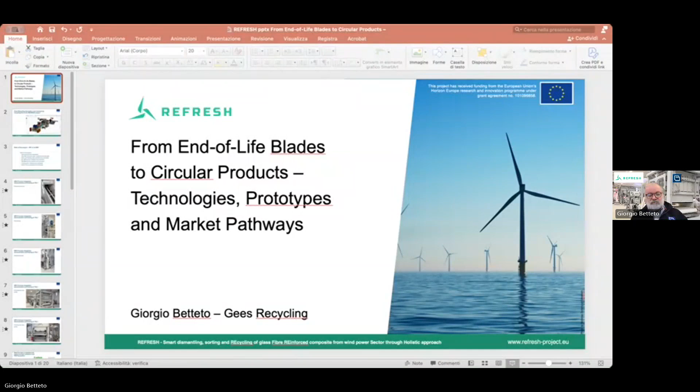We don't see the slides. Sorry. That makes it another way. No, we can see, okay. So I go back to the other. Okay, let's go back then.

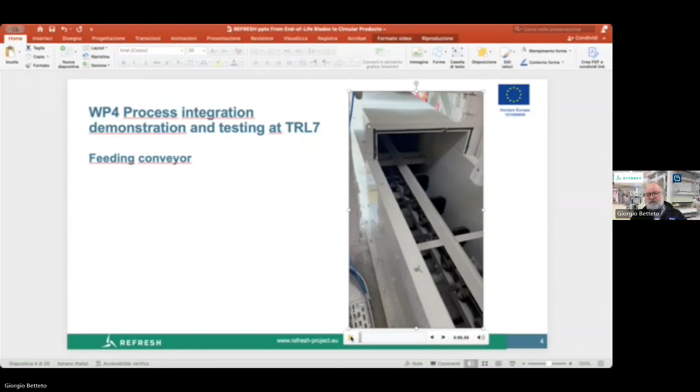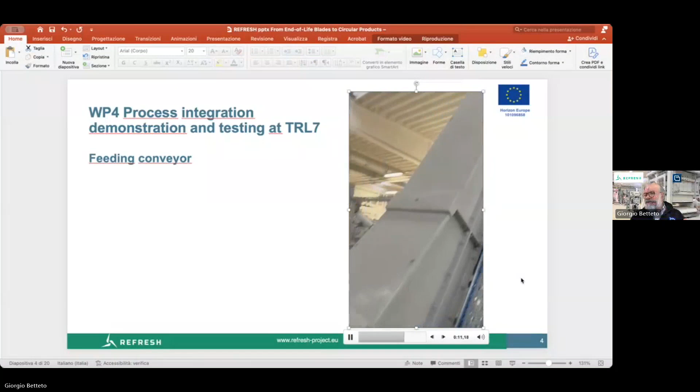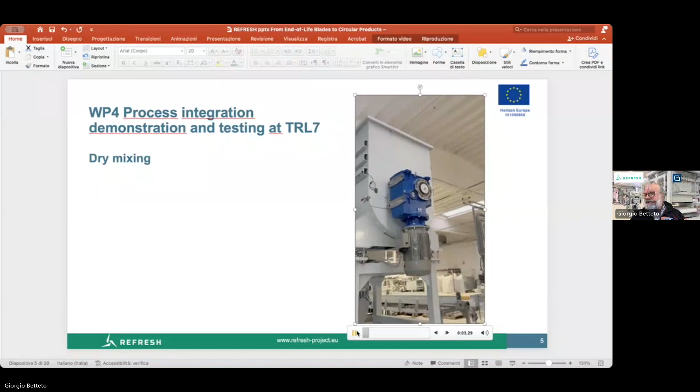So these are the machinery that we have developed. I am going faster now. As I said, the question is that there are no market equipment, so we needed to design a product and build it. We needed to have this.

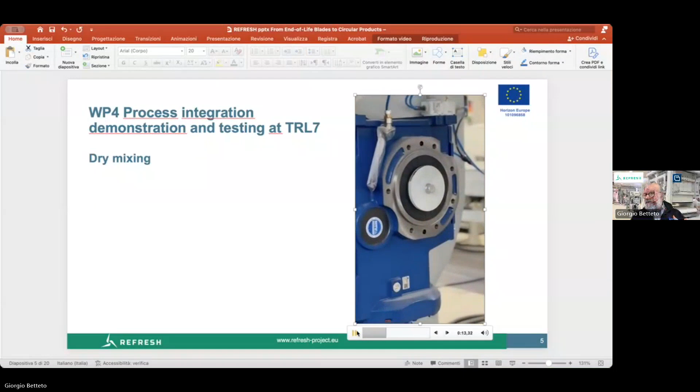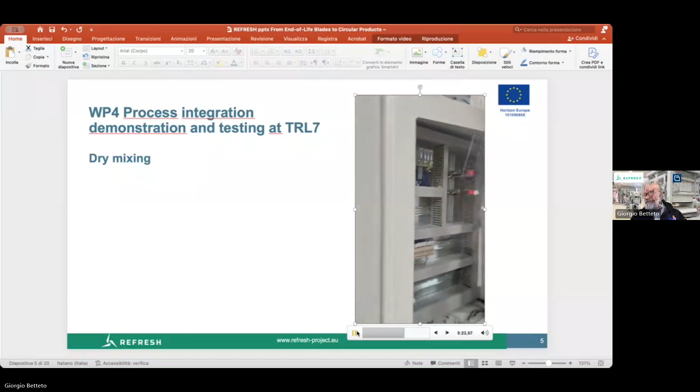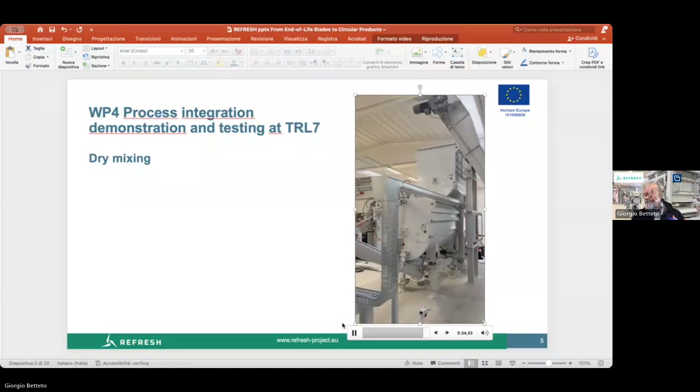We have transformed one of the problems of recycling this kind of process of very different components, because in the wind blade, particularly in the wind part, we have laminate high density epoxy fiberglass laminate, density 1.7. We also have low density core material that could be PET, polyurethane, could be of very different type, at a density of 0.090.

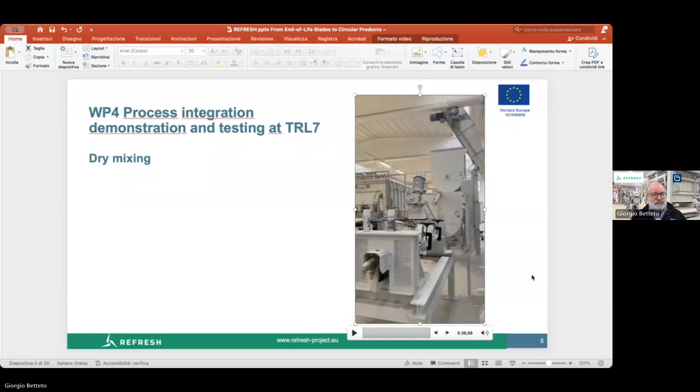And we have transformed this problem into an advantage, because in our process it's possible to mix the different components, which permits us to make a wider range of products. The different composite, the different feedstock make the process more homogeneous.

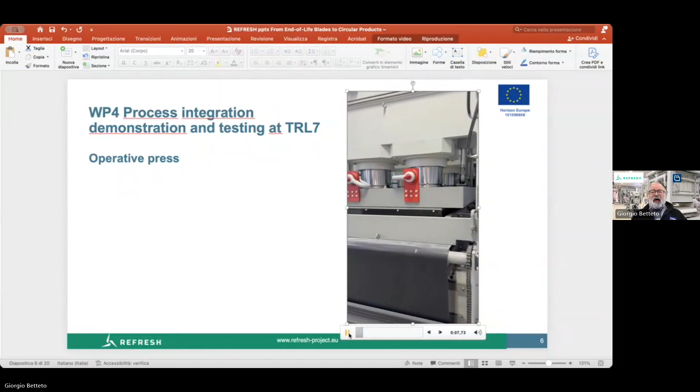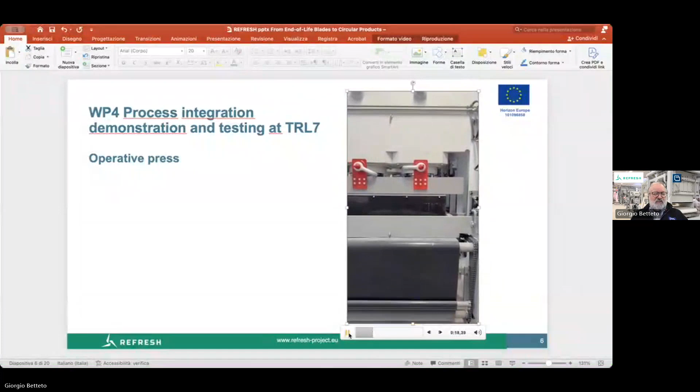This is the pressing, the 6,500 ton press, where the polymerization of the mix is completed, and where the product is transformed into a solid material.

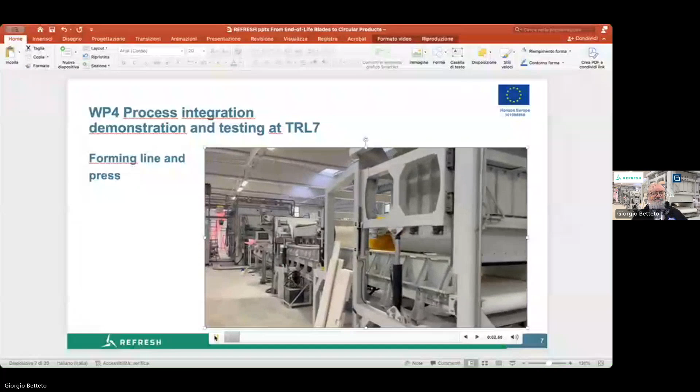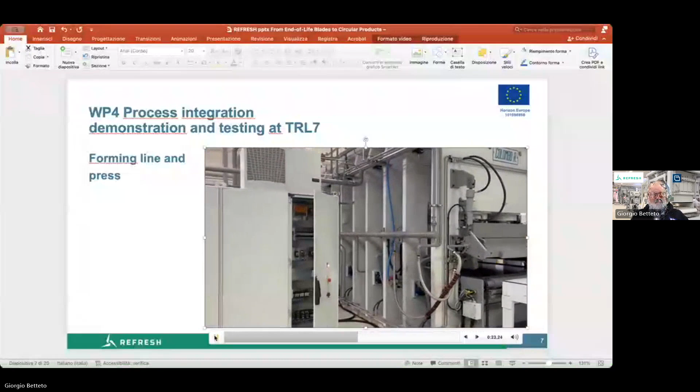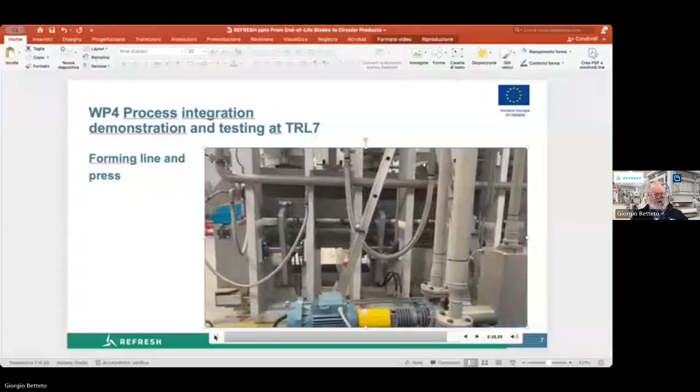Let's show also this, the most complex part of the forming line, where this mixed material is mixed homogeneously and distributed before going into the press. It's a unique machine, because normally in this field, in similar equipment, for example for wood particle or for ceramics, you normally have very identified and separated granule feedstock. Instead, we had to grant a homogeneous mix of very different materials along all the length, so it's something different.

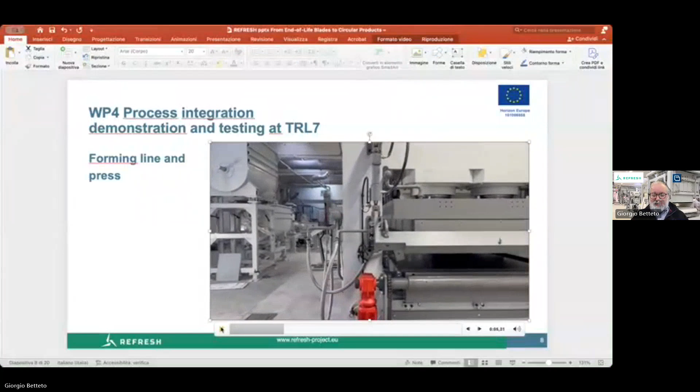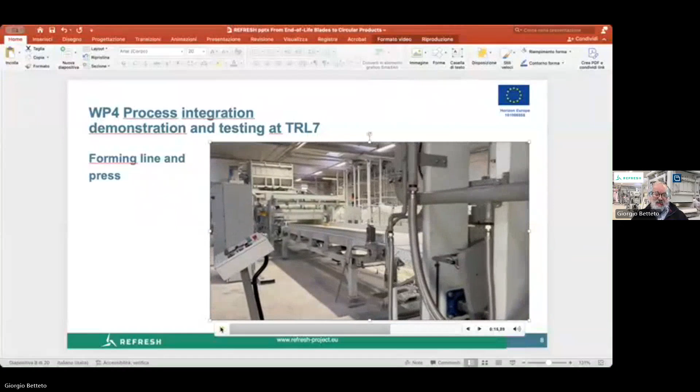Let's go faster. This is just to show that this is now an industrial project. This line is starting practically now in making the first production. We plan to reach a production of 700 tons a year.

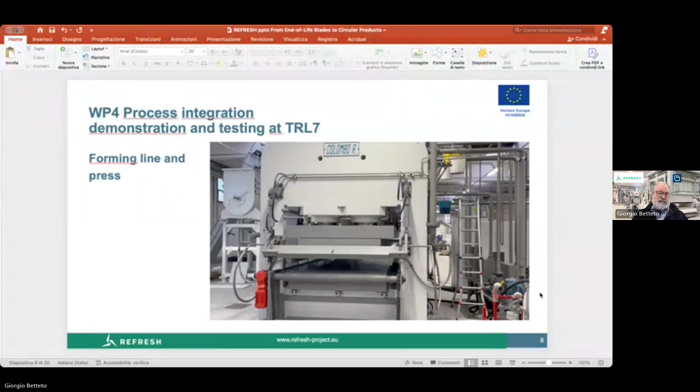The machine is fully controlled by computer, and we have all the tracing. We have a complete tracking of all the components. One of the most important aspects of this industrial production and this recycling is that...

we have no emission apart from some dust that is always unavoidable when working in composite. But we have improved a lot our collection and filtering system, also because the dust could be a good piece for us. The important thing is that we just got the results of the tests, and we are practically 10 times lower respect to the legal limit for dust.

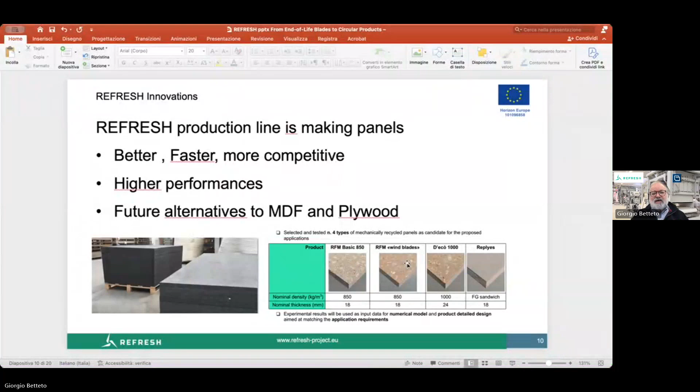For the rest, we have no... Our line is already making panels, making products in a faster and more competitive way compared to the past, and we are convinced that these may really be good alternatives to MDF and plywood, and we will show something.

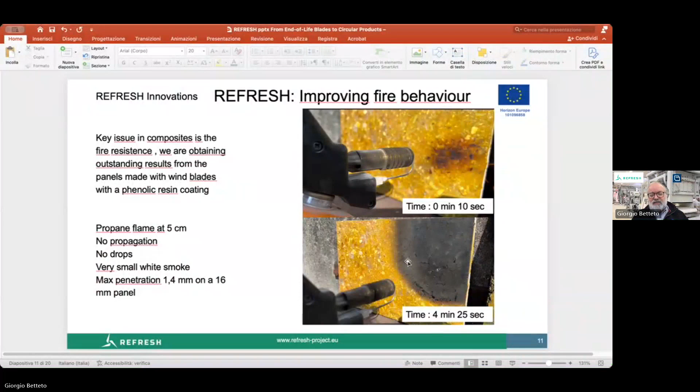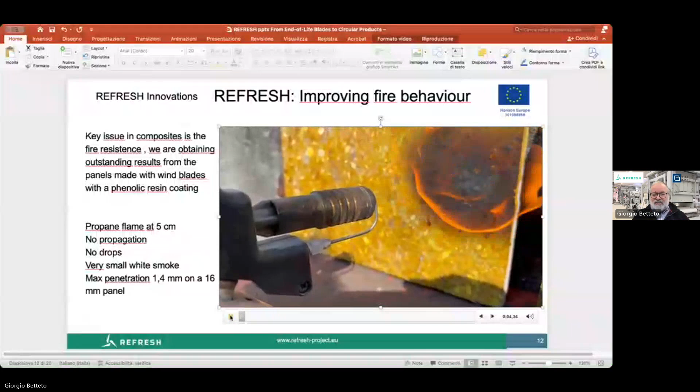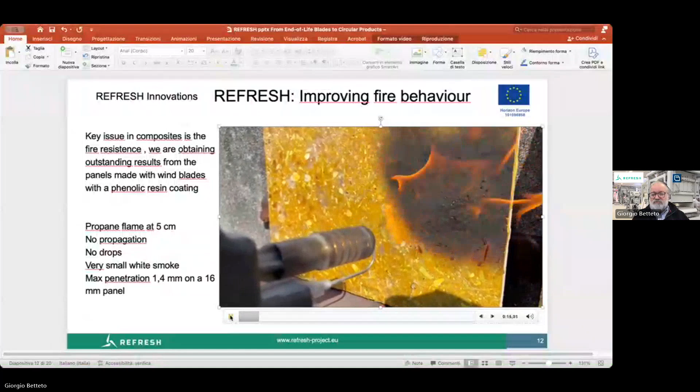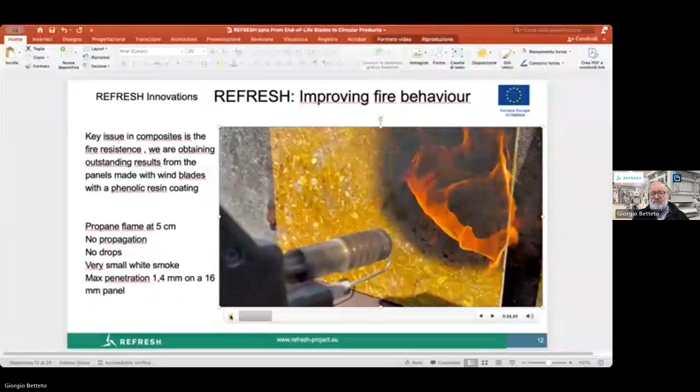Also another important thing is to find a way to improve the fire behavior of the composite. Since most of our products are designed for construction or furniture, fire requirements are important, and we are demonstrating that it's not only possible to obtain a very good result with recycled feedstock, recycled material, but even to increase the fire behavior aspect with the material.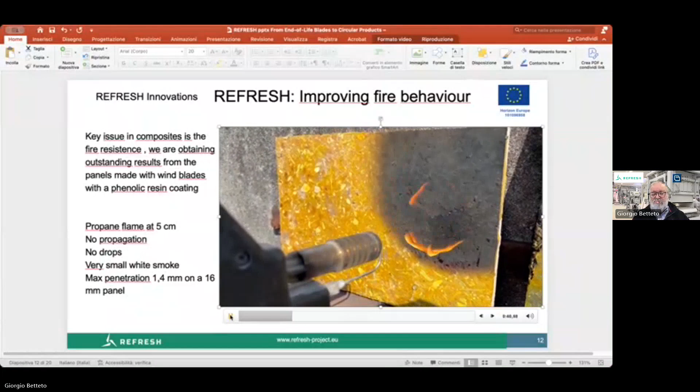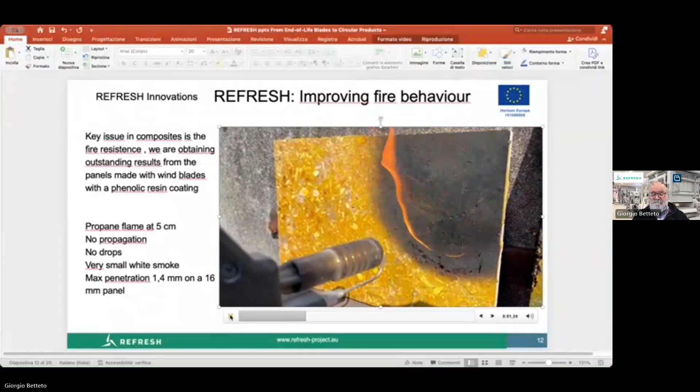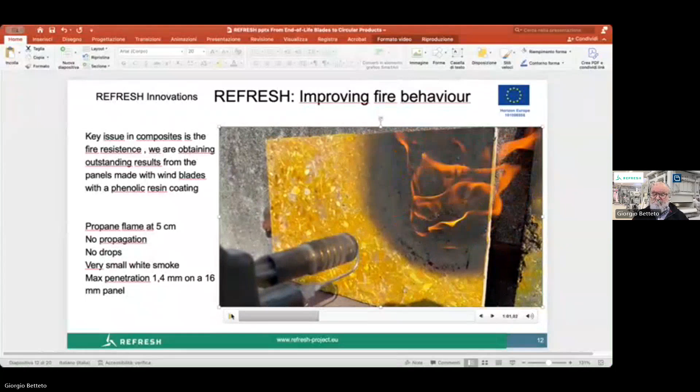Here we are seeing a propane flame on a panel made from wind blade with a special phenolic binder that we are also developing. The most important thing is that not only do we have practically no propagation of the flame, but we also have very low smoke emission. I will stop because otherwise we could go on for several minutes.

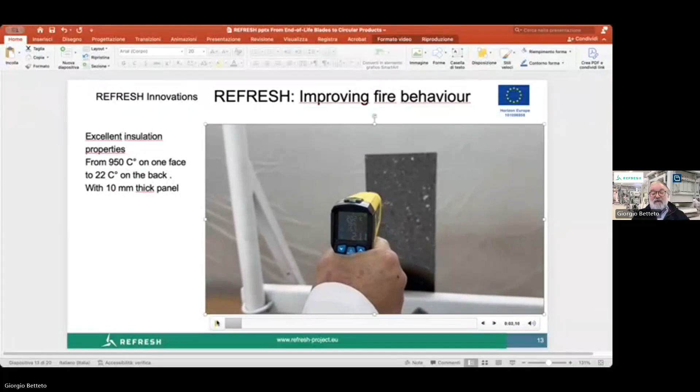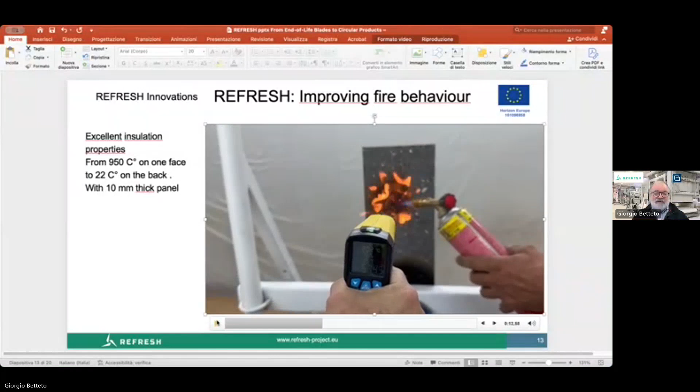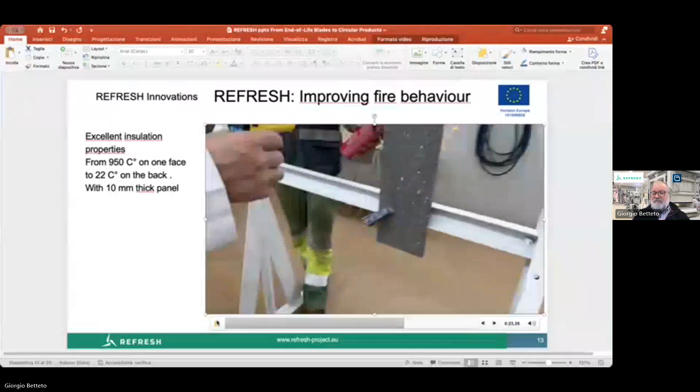Another important thing is that these panels have very strong insulating properties. So you may see that on the front we may have 600 or 800 degrees, and on the back we may have something like 20 degrees. So there is effectively no transmission of the heat, and that is mostly due to the fact that it's all composite.

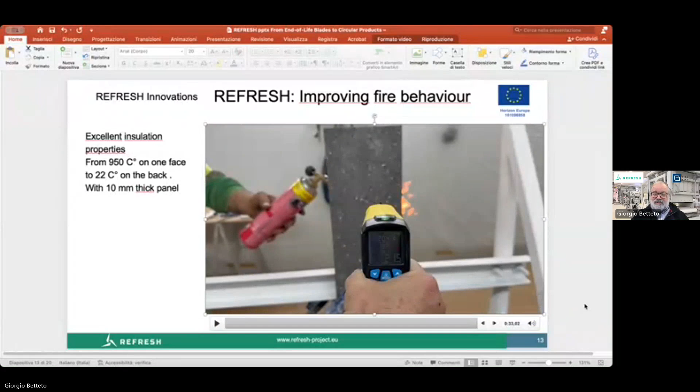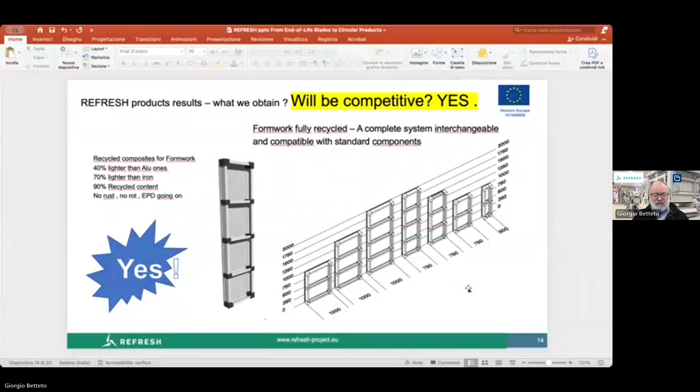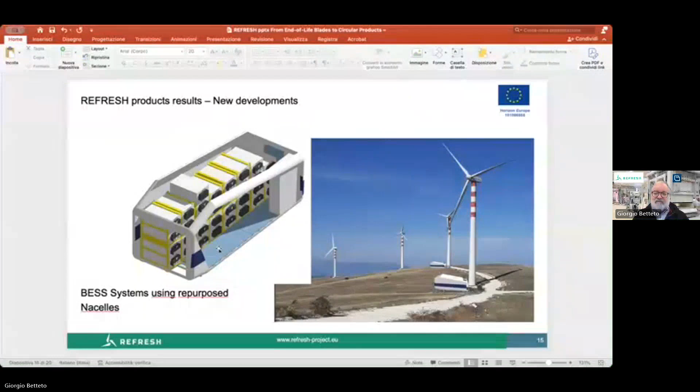We are developing now also a battery storage system using repurposed nacelles. There are very large quantities available, and in the nacelle we are repurposing and reusing - we are using our panels to make the new flooring and the new racks, and inside there are sodium-ion batteries, because they are most well suited for long-term storage and also don't have the fire risk that would practically forbid use in a recycling environment.